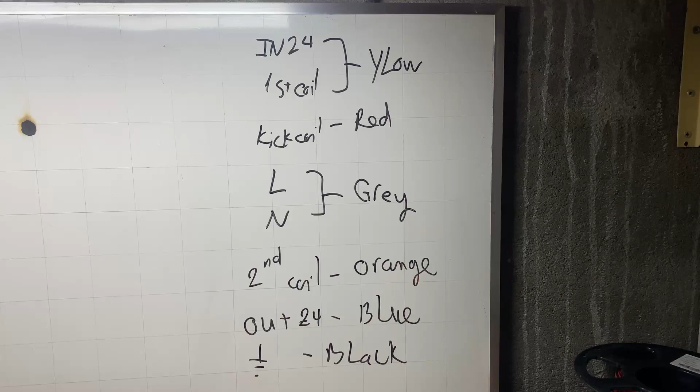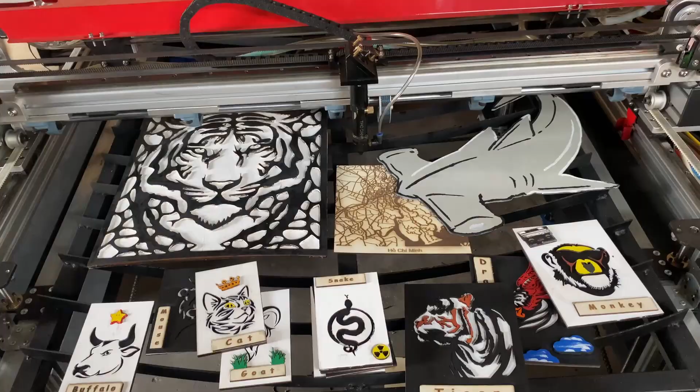Just got a new order for a carbon dioxide laser cutter and engraver, you guys. This machine uses an MKS DLC board and a G-code license from LightBurn, which works well on G-code files and vector files, like I did with this machine.

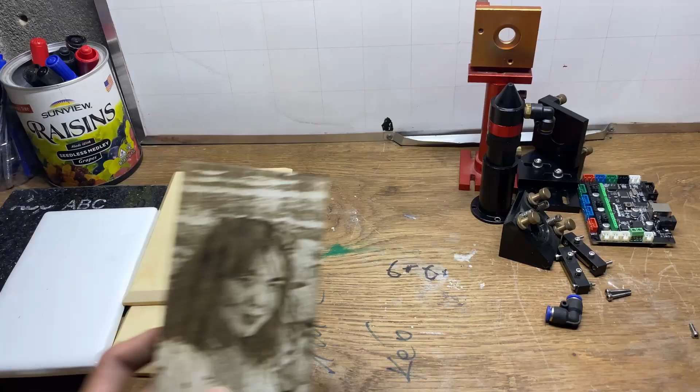My new order is engraving portraits on this material using a DSP license from LightBurn, which is compatible with Trocen board or Ruida board. And here is the DSP license from LightBurn, and the price is good.

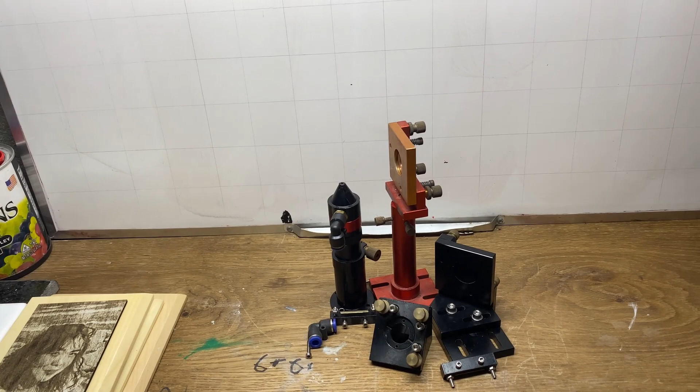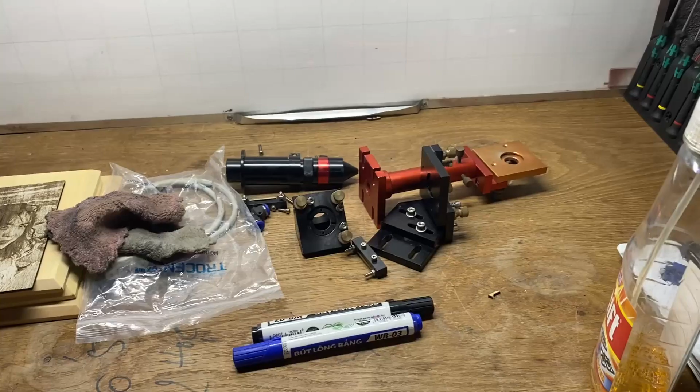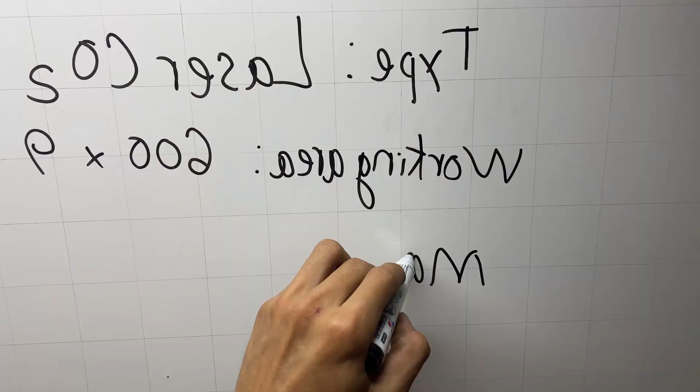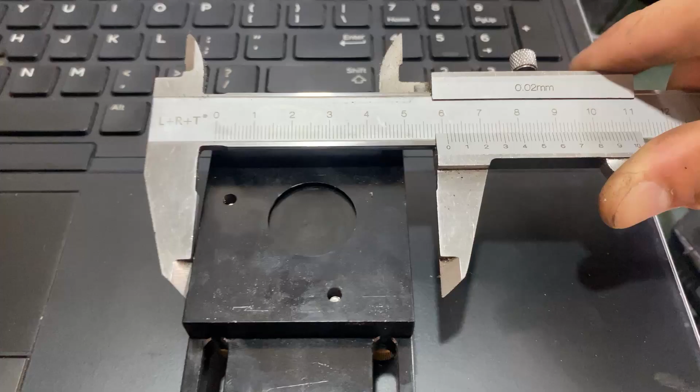Now I'm starting with the second mirror supporter using the line command, then extruding an 8mm part. And after measuring and drawing those parts, I assemble them to each other to get the correct exact position.

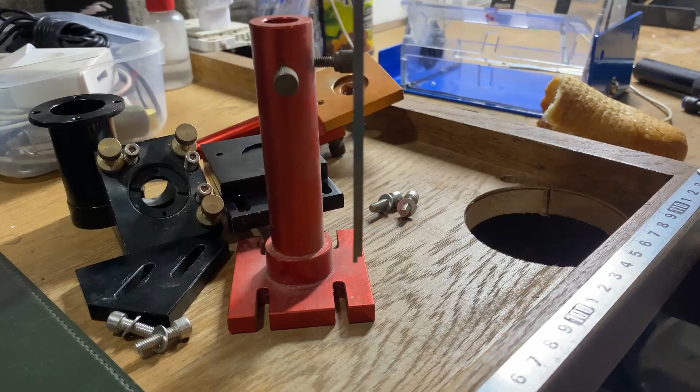The same as before, I'm using an extrude command, then specify the wall thickness to make a regular base as you've seen. Next step, revolve a sketch profile around a selected axis, then specify the extent type, direction, and operation.

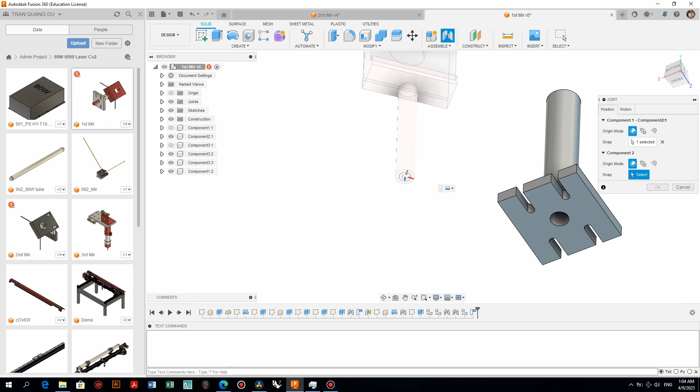Place a joint origin snap point on each component to position them, then adjust associated settings at joint limits and review joint motion. I'm using rigid to lock components together and remove all degrees of freedom.

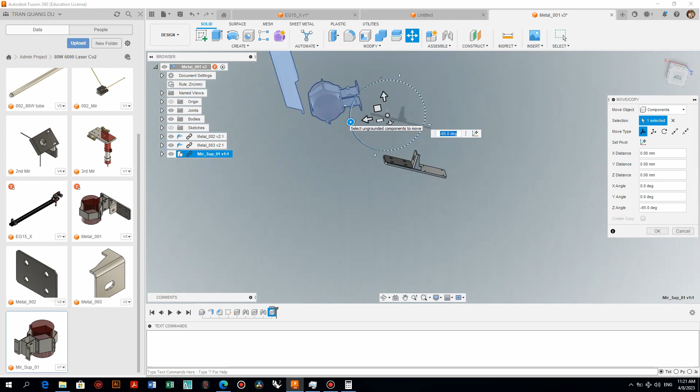Here is a tube supporter base, and the component just appeared is a tube supporter. Still using rigid to stick them together because they're gonna be fixed and have no movement on each other. The red one here is a simulated suspension for the glass tube that is used to isolate the delicate glass tube from the metal mirror supporter.

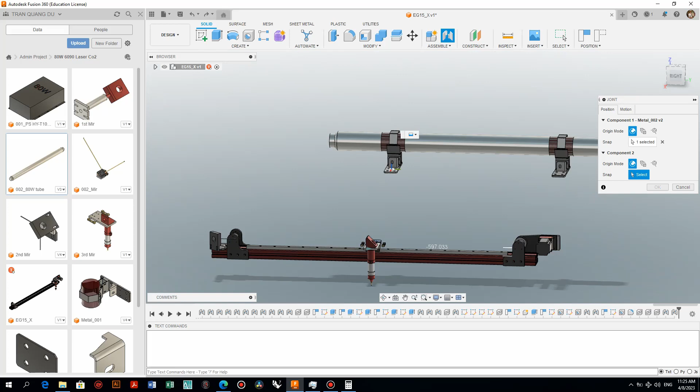Then link the whole glass tube and mirror supporter on the x-axis to check whether there is any problem or not. Checking the distance between two pulleys, then moving an aluminum part and a UCP bearing on it until I get the two pulleys at their good and precise position.

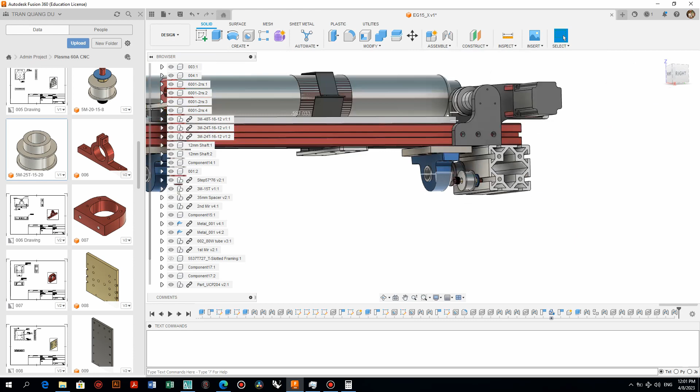I have 4 alu parts and 4 UCP bearings for holding and supporting the y-axis. Now, I'm calculating the appropriate distance between them in the 3D workspace first.

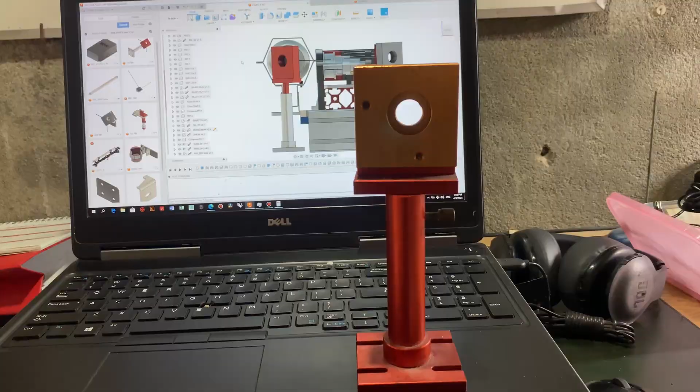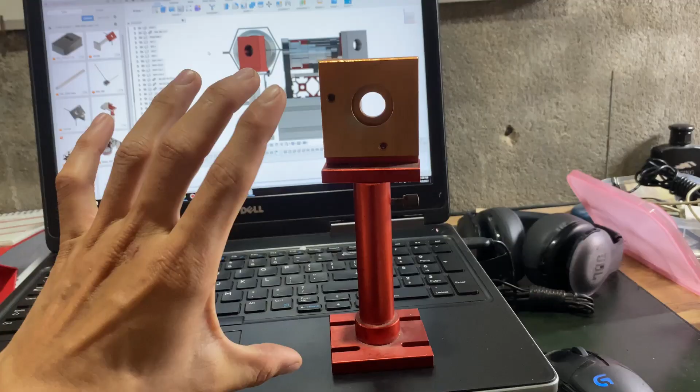This is the first mirror and it's kind of too high for the plane of the aluminum profile. Then I'm gonna cut this one off to make it shorter. Before cutting in real life, I have to first use 3D simulation to give me the length which I'm gonna cut off.

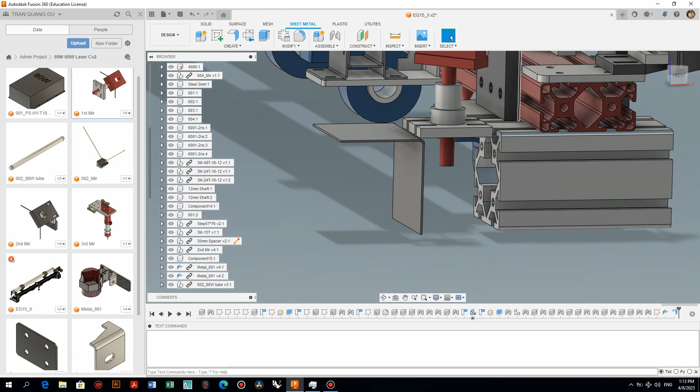After adjusting to get a good result for the first mirror, I jump into the sheet metal environment to make a standing base for it. And for the standing base rigidity, I add an angle plate, then weld it to the first mirror supporter base.

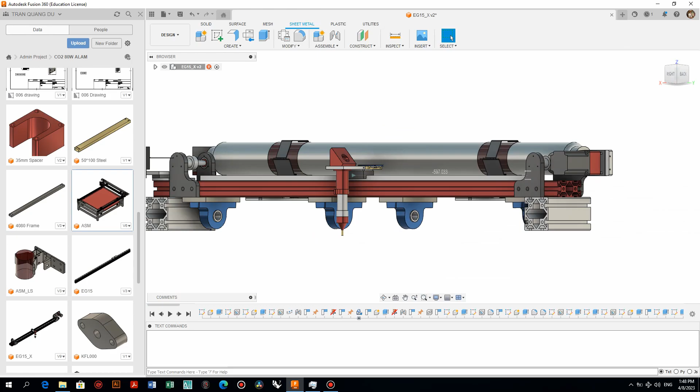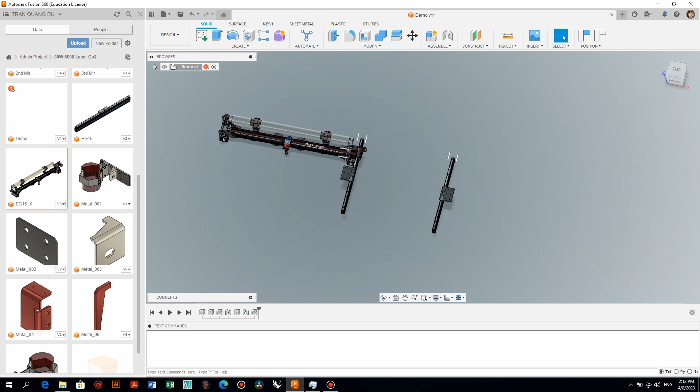The two aluminum parts for the y-axis are the same because of the simplicity. Joining this part on the linear rail and preparing for the x-axis installation. Inserting the x-axis that I have done before in this file to make an assembly. Using rigid joint, as usual, pick the first and the second joint origin on each component and adjust it to get the job done.

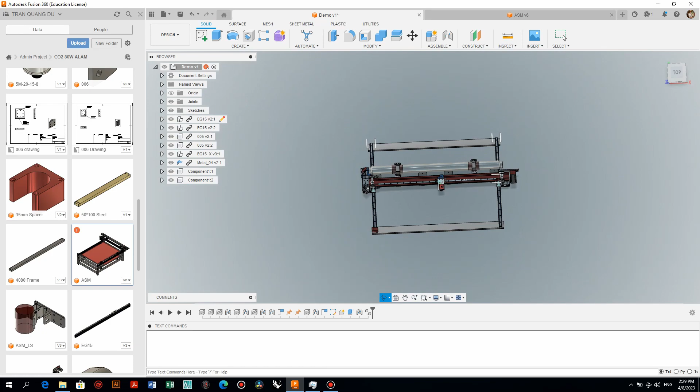Before having any X and Y movement, let me connect the dual Y aluminum profile bars by using two 60-60 square steel bars. Let's jump into the sheet metal environment for some new update about the dangerous thing that may befall us. As I'm drawing, we need a second mirror supporter steel cover to prevent the laser beam from coming out unexpectedly.

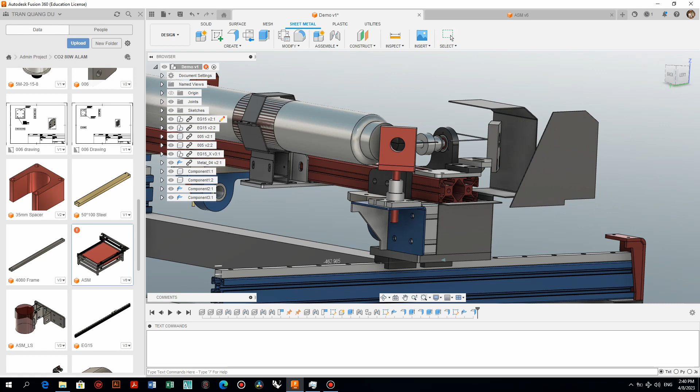I didn't do that at first, but I got a ton of complaints about my design and the safety of our machine when it operates under our customers' control. So, upgrade and change are inevitable.

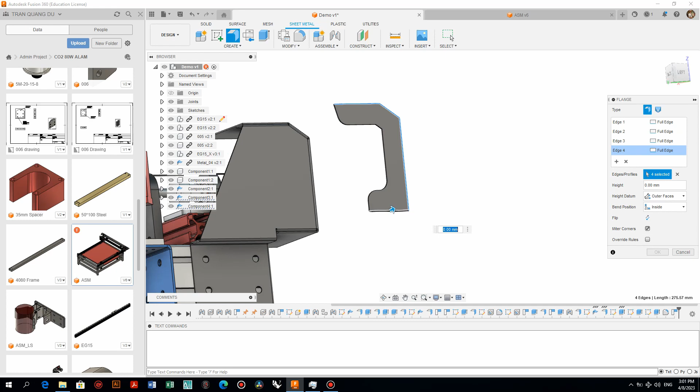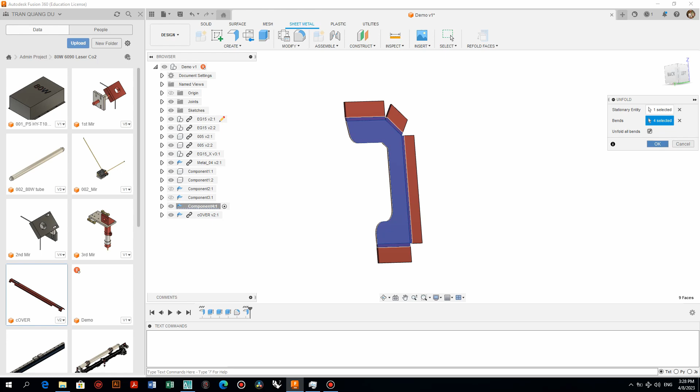The second mirror supporter cover is divided into 3 parts and will be welded together for rigidity. For the manufacturing, I have to unfold them, make them flat for fiber laser cutting. After that, the folding process will come to make our drawing come true. Having some last steps of assembling the cover to check for any problem and deal with it on time.

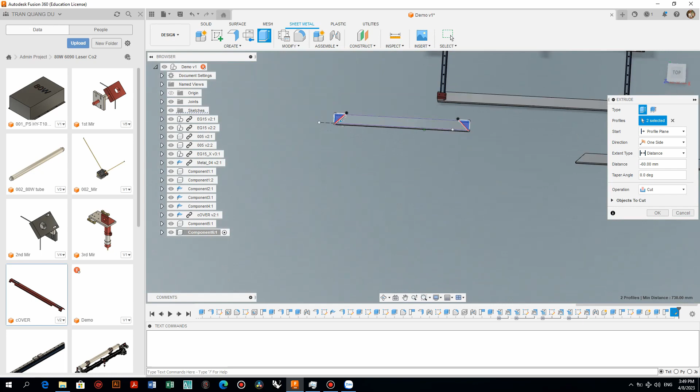The upper frame for X and Y operation. Now I'm drawing the base frame for the upper one. Just having one type of steel bar for these two frames. It's 60-60 square.

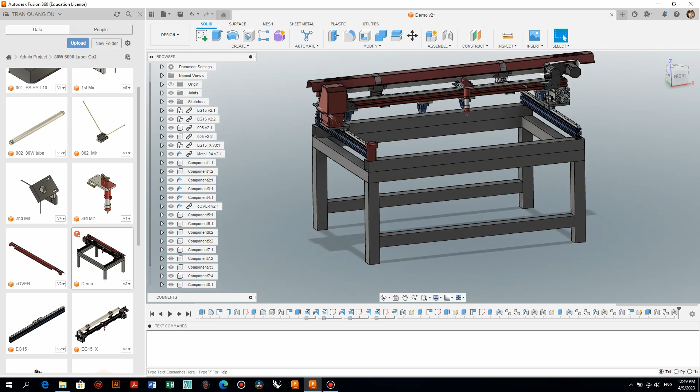So we got a lot of empty space here, preparing for the electrical box. And like I said before, I got a lot of failed projects. That's why all these metals are around my storage. And I should take this guy and make it become an electrical box.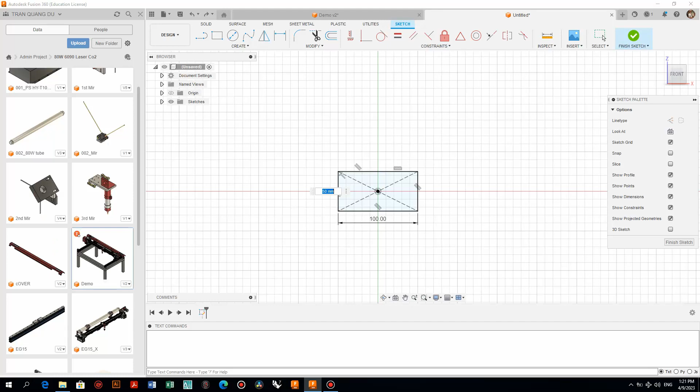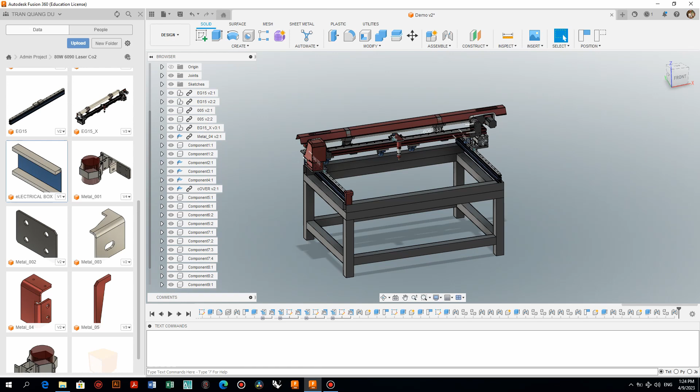Measuring a real plate to a 2D sketch, then it becomes a 3D plate in the workspace. Using a short command for a 50 and a 100 steel bar for the electrical box. Assembling the metal plate to check the right position. Inserting our colorful electrical box using a rigid joint for the base frame and the box. Then keep checking every single side of this drawing to make sure that there's no problem at all.